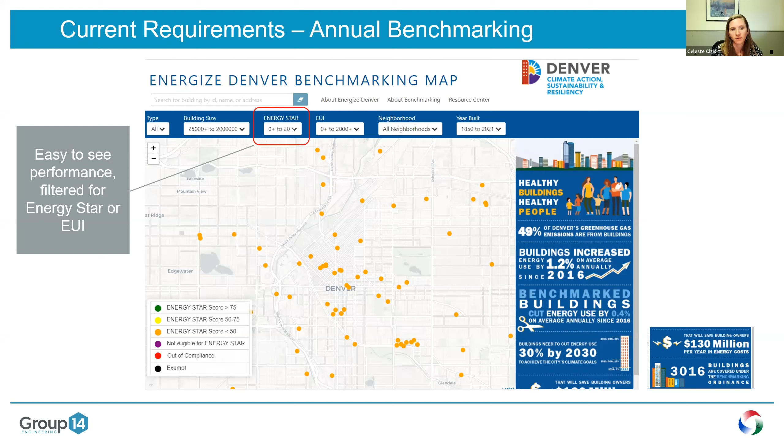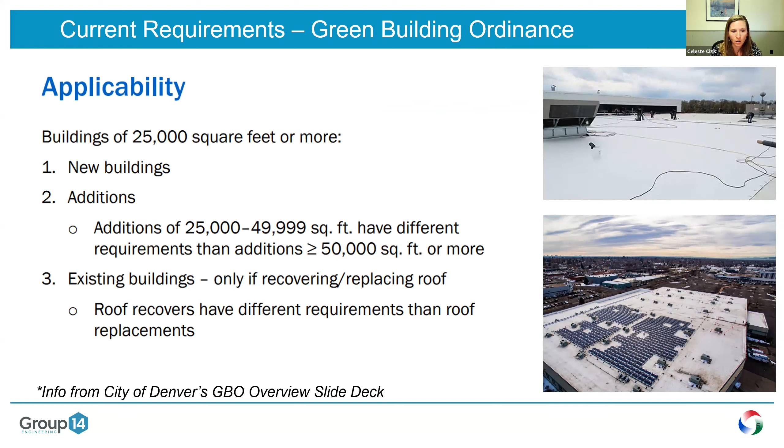The other current requirement is the Green Building Ordinance. And this started as more of a green roof ordinance. So how this rolled out for existing buildings is it's all tied to a roof replacement. So if you're not replacing a roof, you probably never encountered the Green Building Ordinance in Denver. But if you are replacing your roof, you are required to meet one of these requirements.

And this is kind of outlined here, where you have different options in order to meet either with green space, on-site solar. This current requirement has an energy program, which is optional. And really what's kind of being rolled out now is turning that energy program into something that will hopefully become policy.

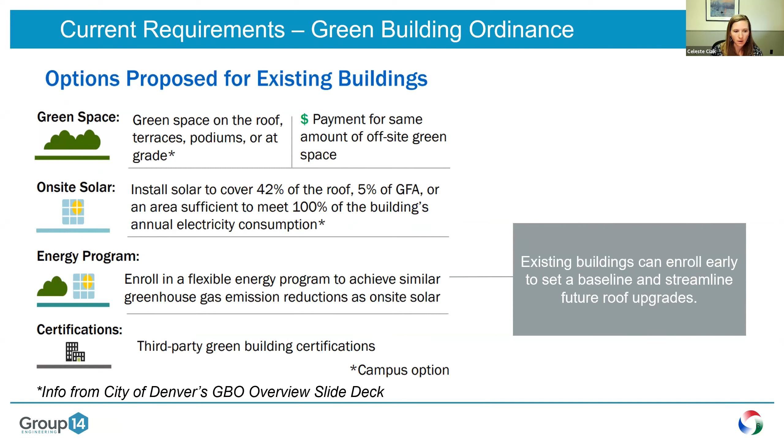So where are we at today? We participated in the 2020 Climate Action Task Force, which looked at all different aspects of emissions and climate change in Denver. So it went well beyond buildings. Group 14 helped that process with technical consulting. So we did a lot of the quantification of the impacts of different ways to address climate change and helping to prepare costs for the city on those different strategies.

And what came out of that was some pretty aggressive goals, a recommendation to reduce emissions 100% by 2040, which escalated the previous recommendation of 80% by 2050. Also looked at recommending a ballot measure, which did end up passing. So the city has increased the sales tax rate by 25%, which is expected to generate between $20 and $40 million a year. So this is really huge for the city to be able to actually implement recommendations from the Climate Action Task Force.

A huge part of emissions in Denver comes from buildings. You can see these charts over here. Close to half of emissions come from buildings and homes, and a big chunk of that is commercial in Denver. So where we're at now, this year, we've been involved in the Energize Denver Task Force. So I'm a member of that task force, and Group 14 is also assisting with a calculation tool to quantify the recommendations from that task force.

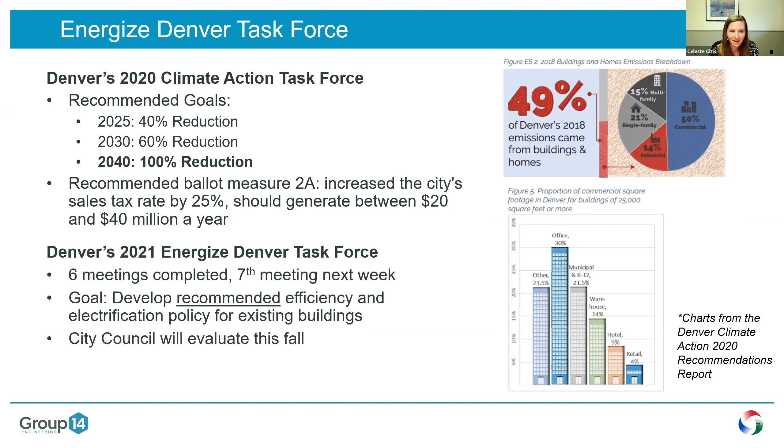So we've completed 6 meetings. The 7th meeting is next week. Some of the things I'll talk about today are just draft recommendations. Nothing is policy yet and won't be policy until the recommendations are finalized, and then it will go to the city council. So yeah, don't go saying everything I say today is set in stone, but just wanted to give you all a glimpse of what's being discussed and what could be recommended to city council.

So diving in on the efficiency and renewables, I know these next few slides get pretty dense with information, and I'll have contact information at the end to follow up. But wanted to have some of the key pieces of information on the draft recommendations. So what we're looking at recommending for efficiency and renewables is a goal to reduce existing building energy use 30% by 2030. So have a little bit of runway to get out to that reduction goal.

And the mechanism that is being recommended is that each building type will have an EUI target, and that's energy use intensity, energy per square foot. So you can see kind of these numbers on this chart here. So maybe for office buildings, that number might be 50, and that's trying to get to that in 2030.

Each building will have its own trajectory. So each one of these lines is a different building. So if Office A has 100 now, they'll have interim targets of an 83 EUI in 2024 and a 67 EUI in 2027.

Looking at including 25,000 square feet and larger, and also crediting solar. This is an important aspect of encouraging to get more renewables on the grid. Denver's trying to get to be 100% renewable electricity by 2030. So anything you can do to encourage solar will really help contribute to that.

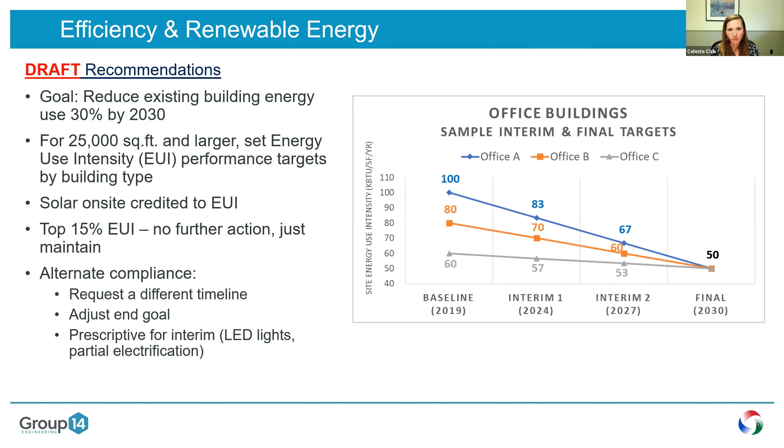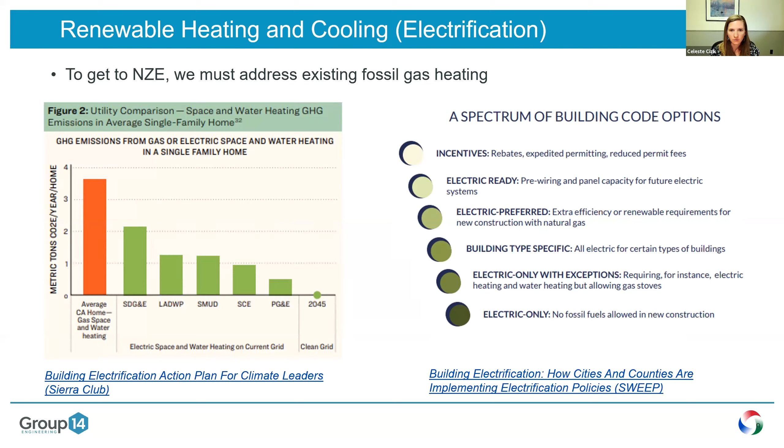So switching over to the renewable heating and cooling. So trying to get all building everything done with renewable energy means that we also have to heat with renewable energy. And our only real way to do that is with electricity. So we have a couple of reference studies here of different ways people are implementing that, a lot happening in California and rolling into colder climates as well.

So the electrification recommendations are, instead of focusing on building size or type, it's really focusing on typology of equipment. So looking at the typologies that are easier to electrify, we're definitely heavily involved in upgrades. I know none of this is truly easy, but the first two categories being that furnace and rooftop unit, they're easier. So you can take a gas-fired unit off, put a heat pump unit on.

We are looking at recommending heat pumps as a primary heating source, but still allowing gas backup. That was one of the findings from the study that I have referenced here that Denver just published, that going full electric for that peak heating day really jumps up your electric sizing. So you might have to replace panels, you might have to replace wires, and that really jumps up the cost. You can still fully electrify. It's just having that option that you can have that gas backup.

So the other two categories, the PTACs being your kind of wall units, there are some options to do heat pumps to replace that, but just not quite as ready for prime time yet. So those dates are a little further out in 2027.

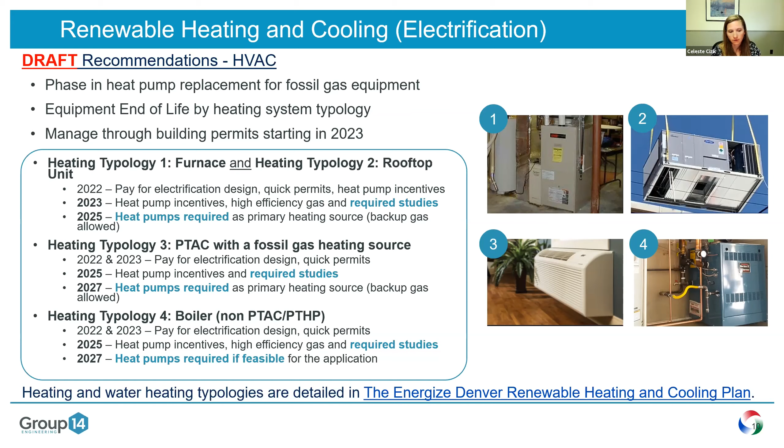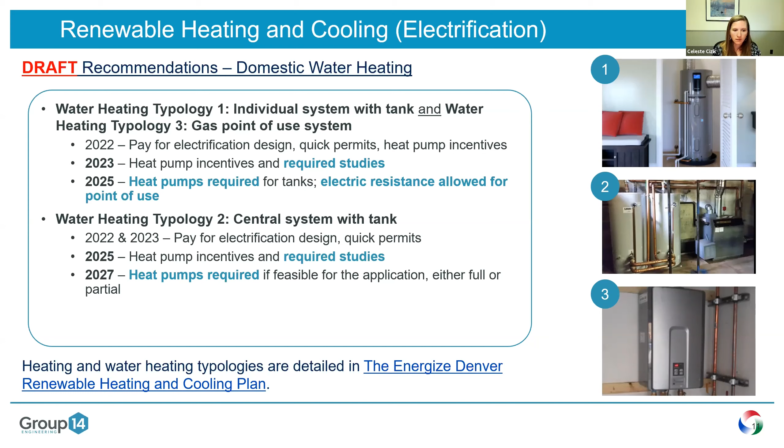And then that system, the tank with the water heater, that's in that same category as boilers. There are some options now. There's equipment under development. There's first generation equipment that people are using today. So it's not that it's completely unavailable, it's just still pretty challenging, costly, and not quite there yet, but looking at 2027 to do heat pumps if feasible.

And this is a summary of the modeling tool that Group 14 developed. So this gives you that kind of picture every year. Those open bars are the avoided emissions from the policy. So as part of this effort, in each different round or discussion, we were putting in different inputs to see the output. So you can see here where we're getting towards our goal. Not quite all the way to the 13.7 million tons of reduction, but a good chunk of the way there with these policies. And also looking at the avoided social cost of carbon.

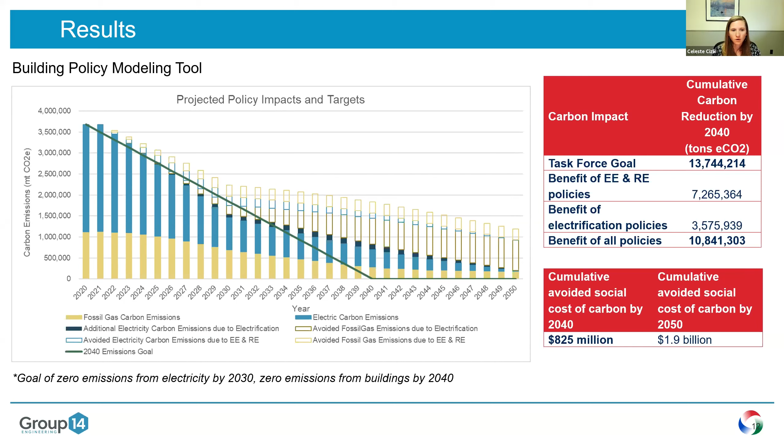These measures are costly. Sometimes that can be the focus, but also trying to look at that bigger picture of cost of carbon on the community. Just wanted to point out that equity was a big focus and is a big focus of the task force, looking at providing support to under-resourced buildings in the form of technical assistance, financial assistance, expedited applications. So there have been discussions throughout on how this will impact communities of color, how this will impact under-resourced buildings, and making sure that those supports are in place.

So just in conclusion, 100% means everything. So while some of these are hard and there are some costs associated with it, we're really looking at electrifying everything. So there's a whole transportation element. We talked about buildings, and yeah, it's a big challenge, but this would help get us quite a way along.

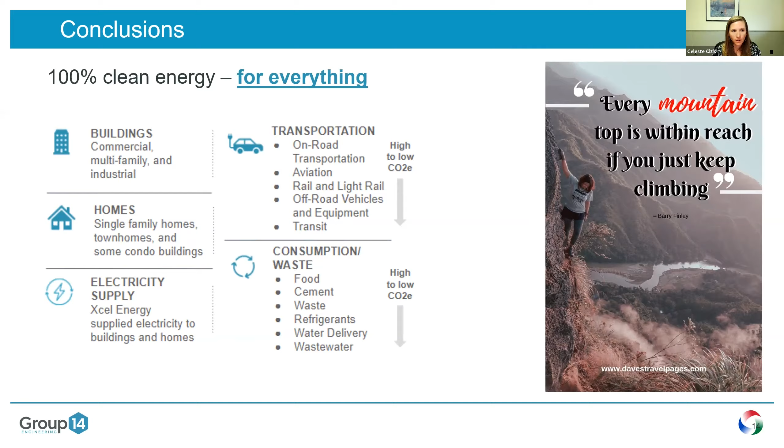And I want to point out where the task force is at now. We have a comment period here. I put in the link that will be posted of how you can get onto a session to provide feedback and learn more. You can also reach out to me directly and I can answer questions and bring comments back to the task force. And that's all I've got, and appreciate the time today.

Yeah, so we have a few minutes, so quick question. When City Council approves whatever they're going to approve, assuming they approve something, is it going to be codified language that engineers have a prescriptive model to follow? Is it all going to be based on energy models in order to comply with some of the benchmarks and that type of thing? What does that look like?

Yeah, so for the efficiency component, it will all be performance-based. So you'll be submitting through your benchmarking like you already have to do today. And by those dates, you'll have to meet your performance target. Okay. And if you haven't met those performance targets, there will be a series of things that happen. Ultimately, it could be a fine or a penalty. So it'll be similar to the benchmarking program. It's not really code in the sense of the code that you follow when you're building a building, but it will be policy that the city can enforce and ultimately fine. That's not their goal. They want to reduce emissions, but that is what that would look like. And for the equipment replacement, that would be more in the permitting. So there will be requirements when you go to get your permit.